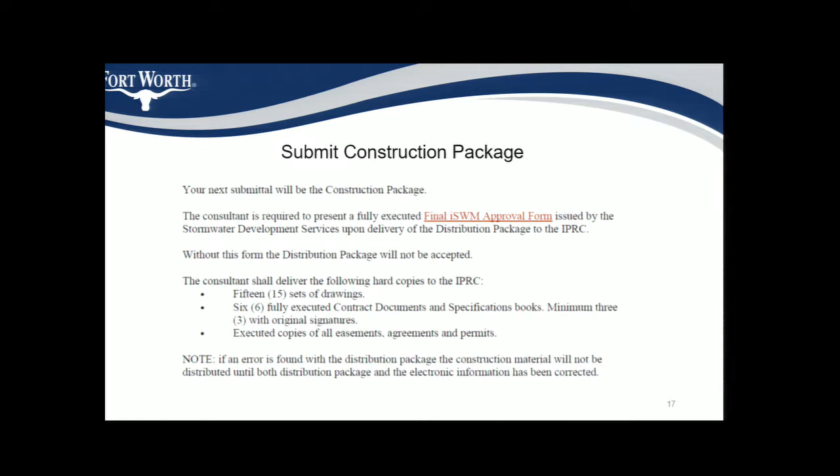The City of Fort Worth Developer Project Proposal Tool basically mirrors the bid proposal of the plan set. The purpose of it is for the city to collect these different unit prices to be filed, cataloged, and used in the future pretty much for setting up internal city projects. That's my understanding.

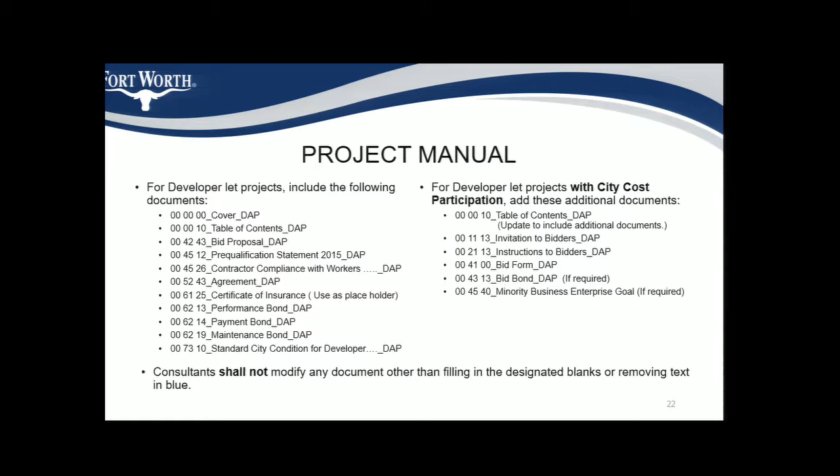The bid proposal is one of the requirements in the project manual. As you can see, there are two examples of a standard bid proposal pay items listed on the example.

Standard CFW bid item descriptions were created to reduce the number of variations of pay items submitted over the years. Bid items provided in the proposal section are used to update the CFA unit prices.

If consultants are unaware of how to pay for an improvement, or question what the bid item includes, please refer back to the specification and it will provide direction on how to pay for that improvement. Standard bid item lists and specifications are located in Buzzsaw at the provided paths below.

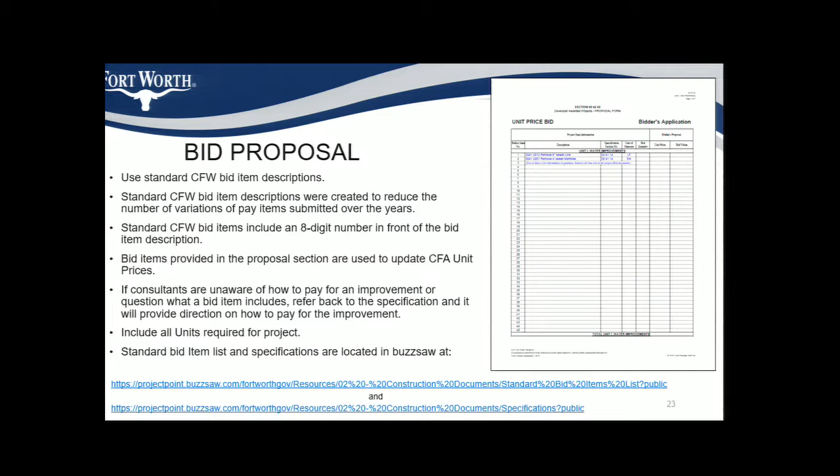On this slide, I'd like to point out to the audience that the bid proposal summary has been revised to include the bidder information and signature block. All new projects submitted to IPRC need to include the revised bid proposal summary sheet.

Another document in the project manual is a pre-qualification statement document. The IPRC only requires consultants to list the work that is pre-qualified for the major work types. Please refer back to the bidder's pre-qualification application for all work types.

Consultants must list all contractors and subcontractors involved on the project. Make sure all contractor and subcontractor pre-qualifications are up to date. If the contractor pre-qualifications are not up to date, the contractors will not be allowed to move forward. Pre-qualified contractor lists are located in Buzzsaw at the provided path below.

Next topic I'm going to be discussing is what IPRC defines as a 100% construction plan set. The IPRC defines a 100% construction plan set as having all the required components in a plan for review. Basic required components in a construction set of plans is cover page, final plat, general notes, water, sanitary sewer, so on and so forth, and construction details, whichever is applicable for the project.

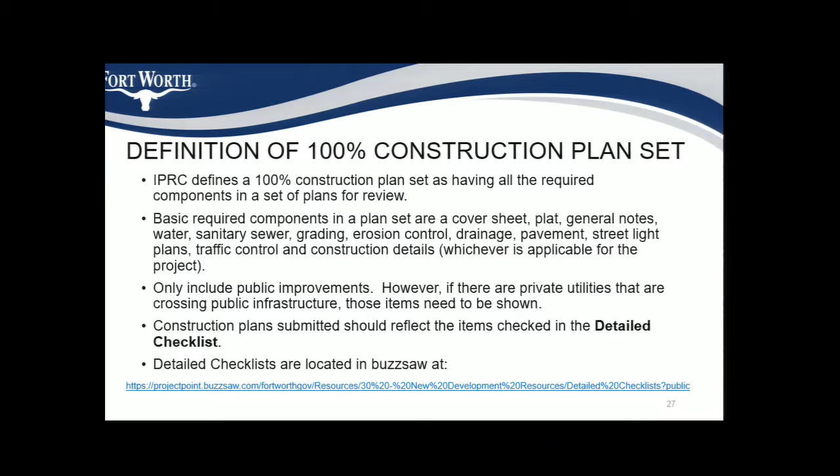The next set of slides are going to be examples of each component in a set of plans. First off, the cover sheet. We are no longer using the DOE number. Please make sure you have your preliminary PE information shown.

The PE has to be registered in the state of Texas. If not registered in the state of Texas, plans will not be accepted for review. Also, your Texas firm number will need to be required on the cover page. The developer cover page template is located in Buzzsaw at the provided path below.

The final plat. A final plat can be either an FP or FS. Those of you who are aware, FP stands for final plat, FS stands for short plat. Planning and Development will assign the final plat number. When plans are submitted to IPRC, the plan set shall have a final plat number shown on the plat. Handwritten numbers will not be allowed on the plats.

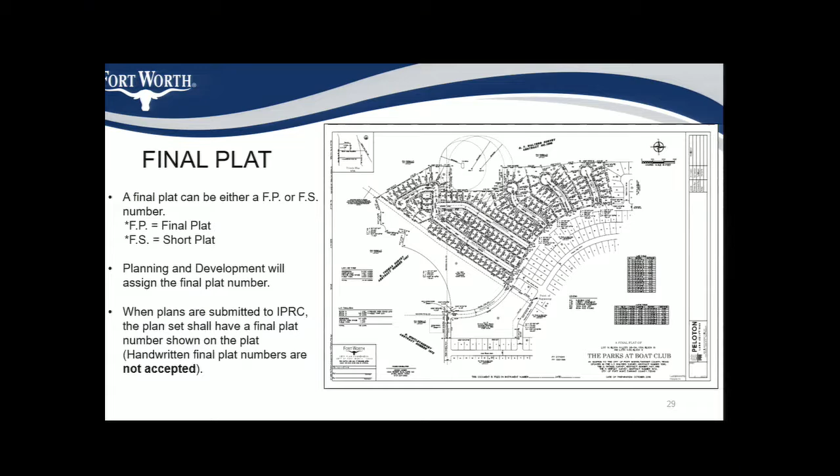General notes. Make sure you include all the divisions applicable to the project. Make sure you include your correct IPRC project manager contact information. Please note that the Water Department is currently updating their water and sanitary sewer notes. Notes are located in Buzzsaw at the provided path below.

The water layout. Here's an example of the water layout. Please use 1 inch equal to 100 scale for the layout. Make sure your water mains are located on the north or east side of the parkway, 5 feet off the property line. Provide any curve data.

Please differentiate between pressure plane boundaries and water lines. Also include the insertion and removal of cleaning pigs and cleaning wyes for each line that you are constructing. Provide water center line stationing and show existing and proposed easements.

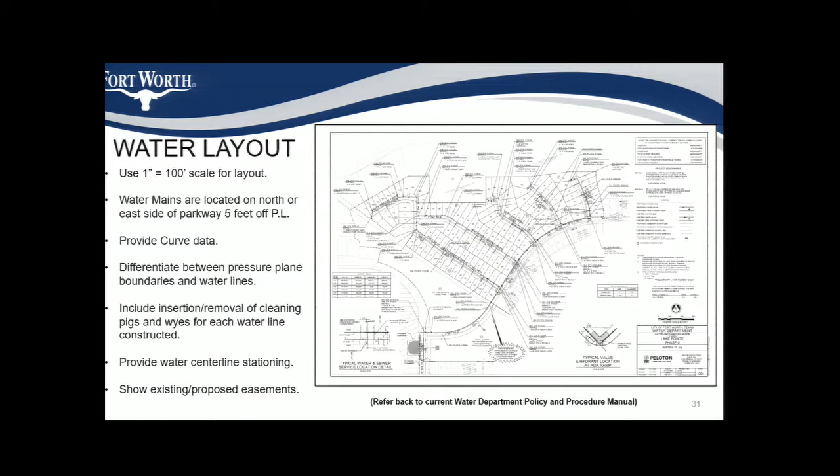Here's a typical example of a water plan and profile. Use 1 inch equal to 40 for a horizontal scale, 1 inch equal to 4 for a vertical scale. Water lines 12 inches and greater require a plan and profile. This needs to be on one sheet. This will be addressed in the upcoming Water Department manual update.

Please provide a construction sequence when water lines need to be lowered due to conflicts. Show existing and proposed surface, grades, and labels. And please show all top-of-pipe elevations in your profile. No flow lines, please.

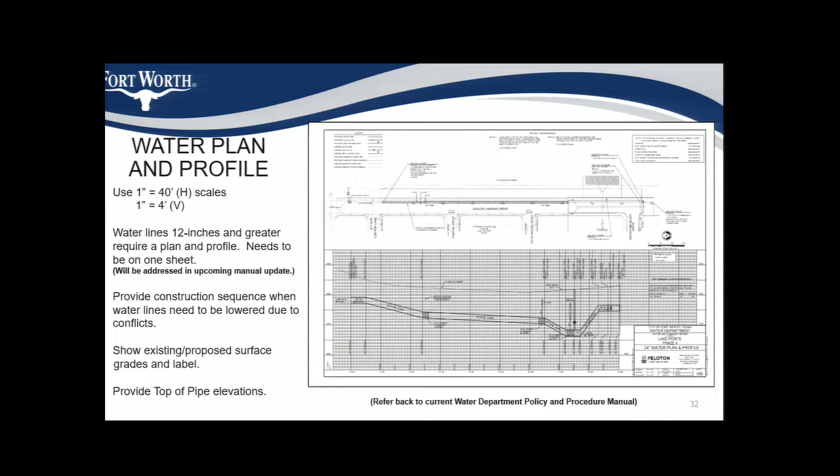Just like the water layout, the sewer layout requires 1 inch equal to 100 scale. Sewer mains are to be located in the south or one quarter point, west quarter point of the street. Make sure your manholes are meeting maximum spacing requirements. Provide any curve data. Minimum radius and manhole spacing needs to comply with TCEQ Chapter 217 requirements.

Provide sewer centerline stationing and show existing and proposed easements.

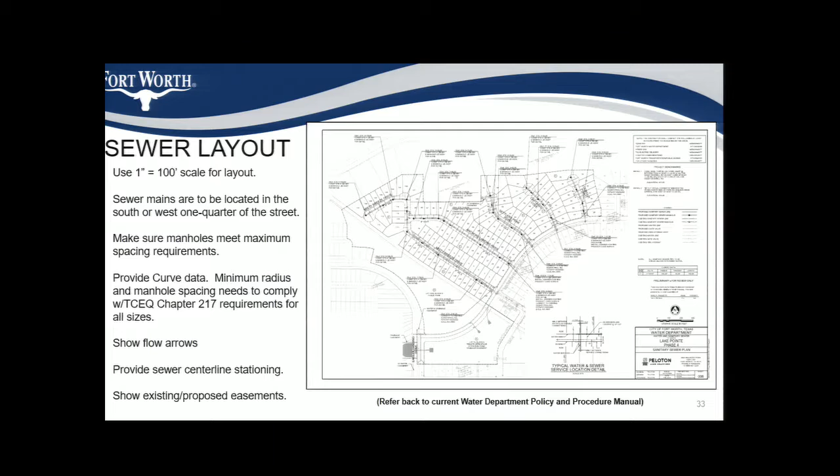Sewer plan and profile, same thing as the water. Please show 1 inch equal to 40, 1 inch equal to 4 vertical. The plan and profile need to be on one sheet. Let me explain a little bit on this. The reason we're asking to have the sewer plan and profile on one sheet is because when you guys update plans, there are items that are missed, such as crossings that aren't reflected, and then that means we have to go back to additional reviews. So this is also going to be updated in the upcoming Water Department manual update.

Sewer grades need to meet minimum and max grades for all pipes. Water and sewer crossings need to comply with TCEQ Chapter 217 requirements.

Here's another topic: show all parallel storm drains. The reason we're asking to show all parallel storm drains is to ensure that there are not any conflicts with the sewer services and the storm drain.

Provide pipe capacities for 10 inches and above in MGD.

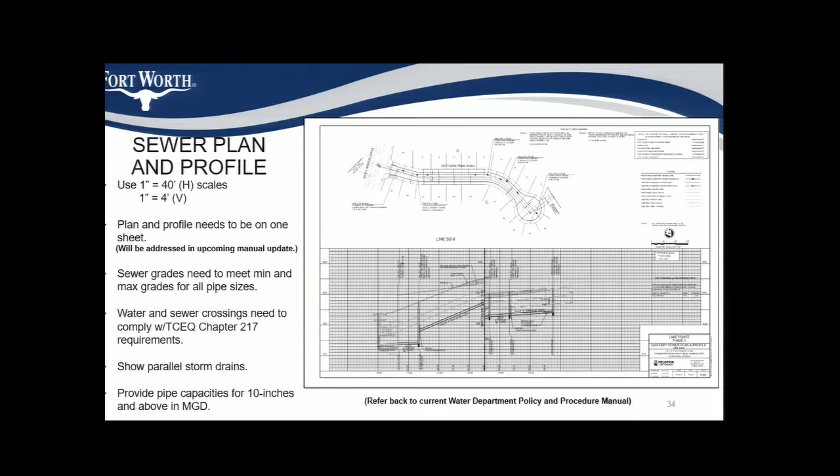Here's a typical example of a water detail sheet. For multiple water line lowerings, provide a table. Do not use your own detail; our detail specifies the specifications on each item. For water mains 16-inch and greater, make sure you pay attention to the minimum burial depths noted on the details for valves and air releases. Once again, the details are located in Buzzsaw at the provided paths below.

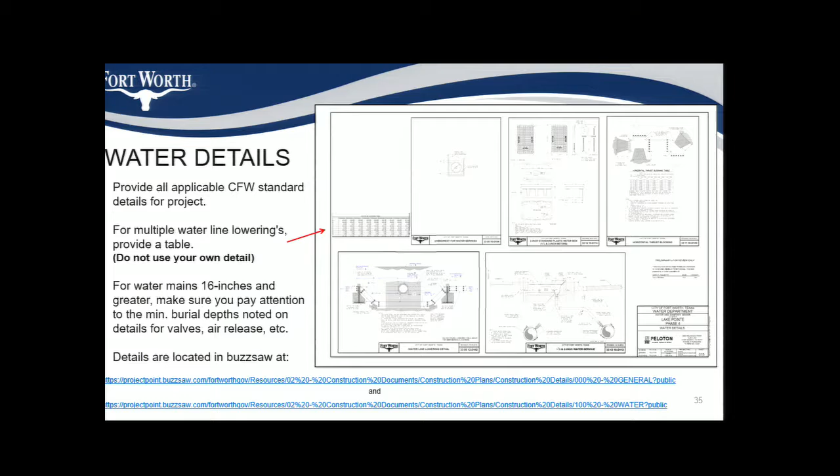Here's a typical example of a waterline lowering table. As you can see, we have multiple waterline lowerings. Each crossing has its own top of pipe elevations corresponding to the detail that we have on Buzzsaw.

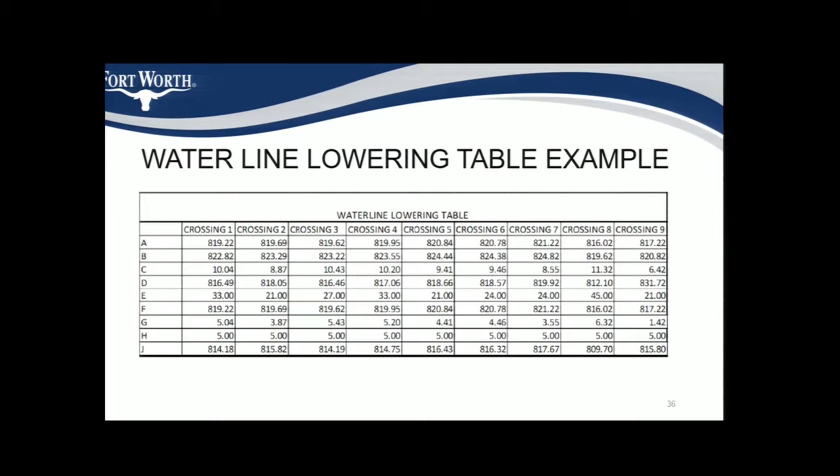The sewer details: make sure you include the appropriate manhole lid assembly detail, as there are multiple ones for different scenarios. Be mindful that minimum depth allowed on drop manholes is 2 feet. Hydraulic slides will be required when this cannot be achieved. Please refer back to the detail for any specifics.

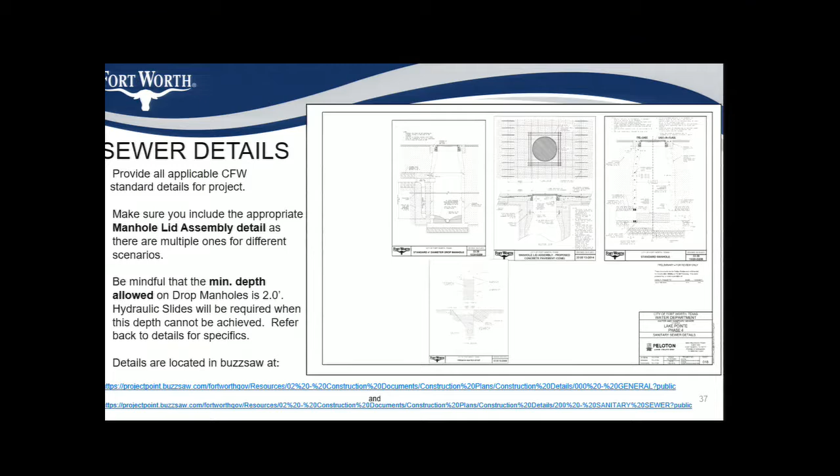Here's a typical example of an erosion control plan. Provide the standard general erosion control detail note. Provide all applicable erosion and sediment control measures. One thing we want you to do is clearly delineate the total area of disturbance in acres. Show all existing and proposed storm drain infrastructure.

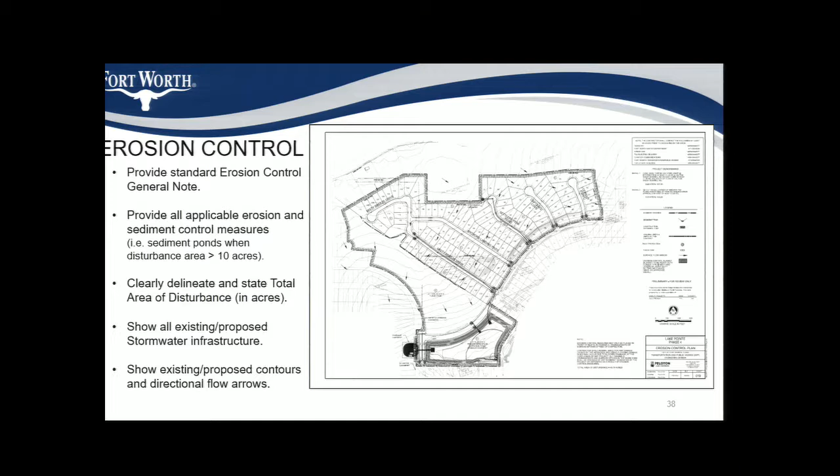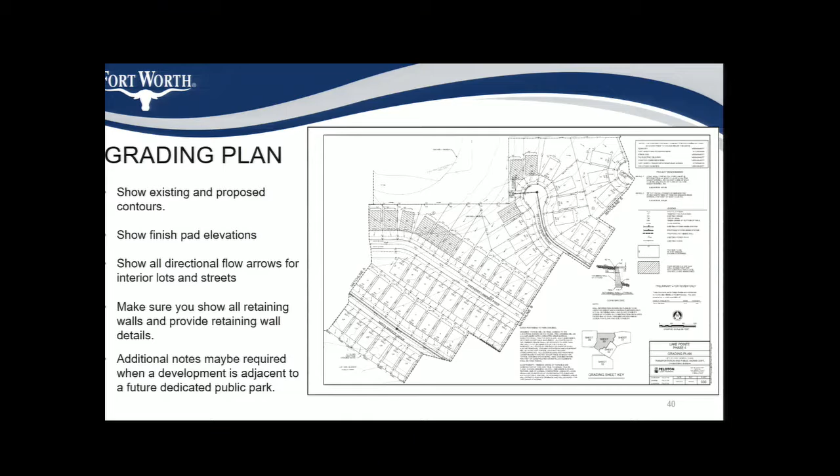Grading plan: show existing and proposed contours, show finished pad elevations, show all direction of flow arrows for interior lots and streets. Make sure you show all retaining walls and provide all retaining wall details. Additional notes may be required when a development is adjacent to a future dedicated park.

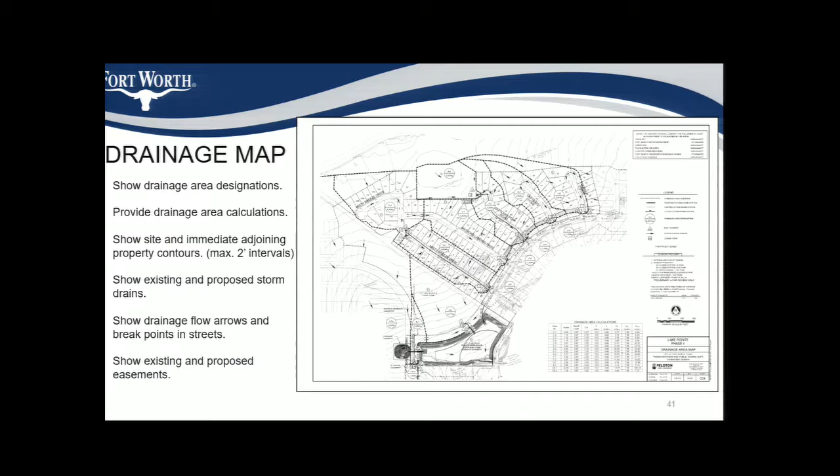Drainage map. Show the drainage area designations, provide drainage area calculations, show site and immediate adjoining property contours at maximum 2-foot intervals, show drainage flow arrows and breakpoints in the streets.

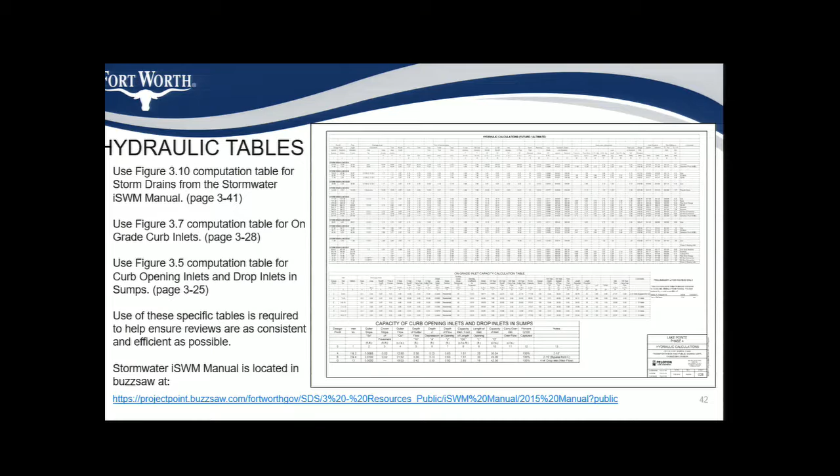Hydraulic tables. This is one item that we usually have issues with because we get variations of hydraulic tables submitted. Use these specific tables. The use of these specific tables is required to help ensure reviews are as consistent and efficient as possible. The Stormwater iSWM manual is located in Buzzsaw at the provided path.

Here's a typical example of a storm drain plan and profile, same thing as the water and sewer. Use a 1 inch equal to 40 scale, 1 inch equal to 4 vertical scale. Provide any curve data. Place the storm drain in the opposite quarter point of the street from the sewer. The reason we're asking for this is to make sure that there's no conflicts between the manholes, between the sewer and the storm drain. It doesn't leave much separation for crews to do any maintenance work on any lines when they have to be repaired.

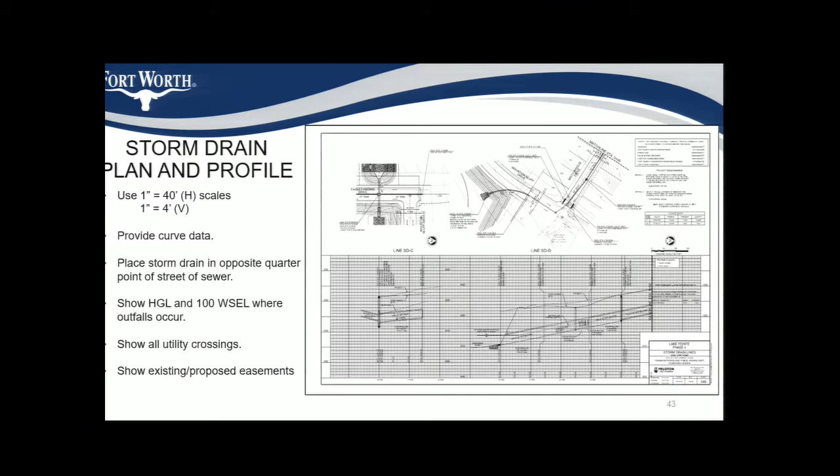Show the HGL and 100-year water surface elevation where outfalls occur. Show all utility crossings, and once again, show all existing and proposed easements.

Paving plan and profile: provide horizontal and vertical curve data when applicable. Please show elbow and cul-de-sac geometrics, including cross sections for elbows. Hatch and label all fill areas. Spec 114 is no longer used in the City of Fort Worth, so make sure you're using the updated specification.

Street grades need to meet min and max grades for all street classifications. One item to be pointed out is to make sure you dimension your existing and proposed streets. We've come across some situations where we've had various cross sections that don't match up with the existing pavement.

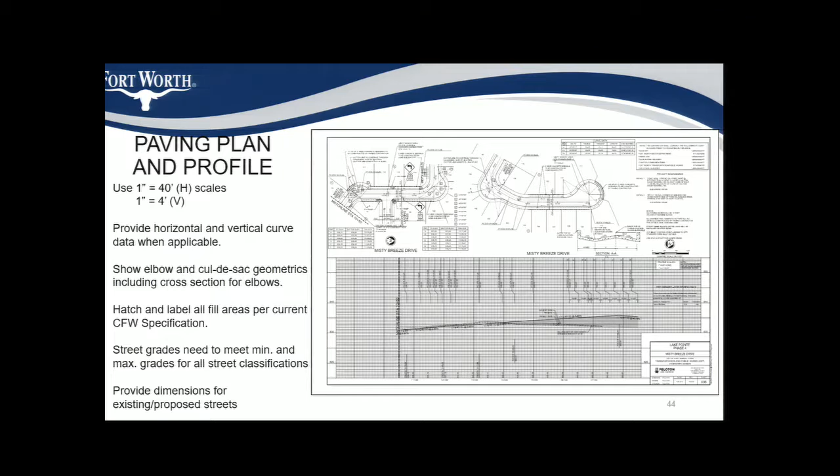Pavement details. Parabolic sections are not allowed for new streets. The details shall reflect the geotechnical report and the pavement design manual for pavement thickness, reinforcement, etc.

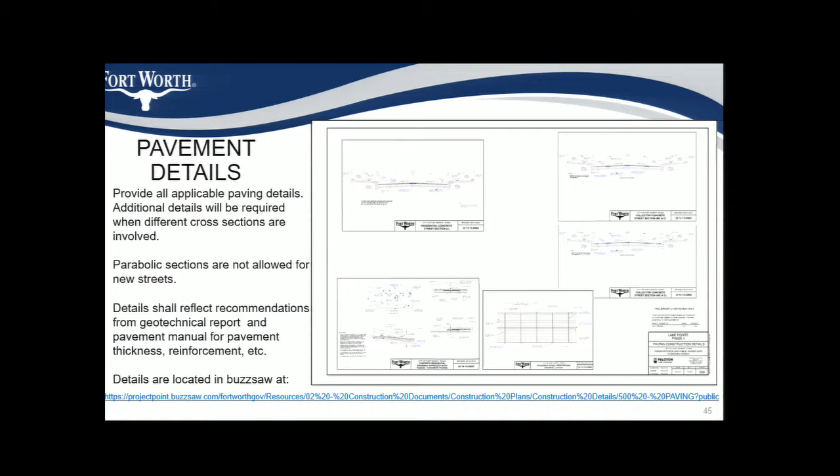Drainage details. Here's a typical drainage detail layout sheet. Please note TxDOT details will be required when applicable. Show your wing walls, head walls, and so on and so forth.

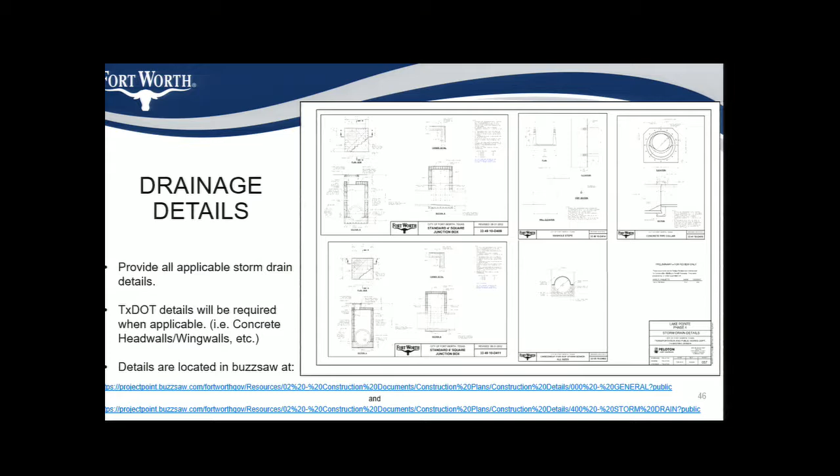Street light plan, use 1 inch equal to 80 scale. Show existing and proposed street lights, conduit runs, ground boxes, etc. Make sure the street lights are located on the opposite side of the water line. Provide conduit tables and quantity takeoff tables, please.

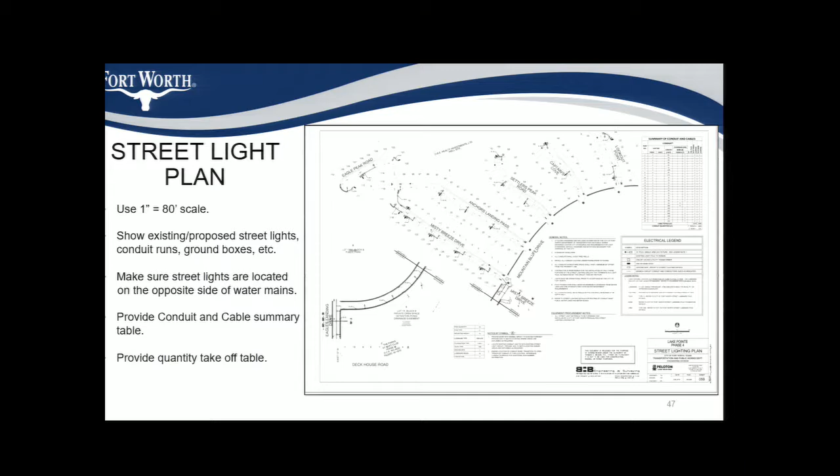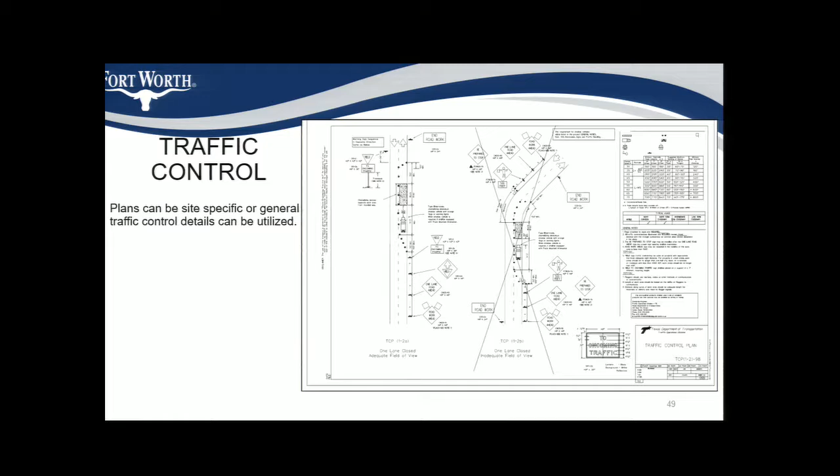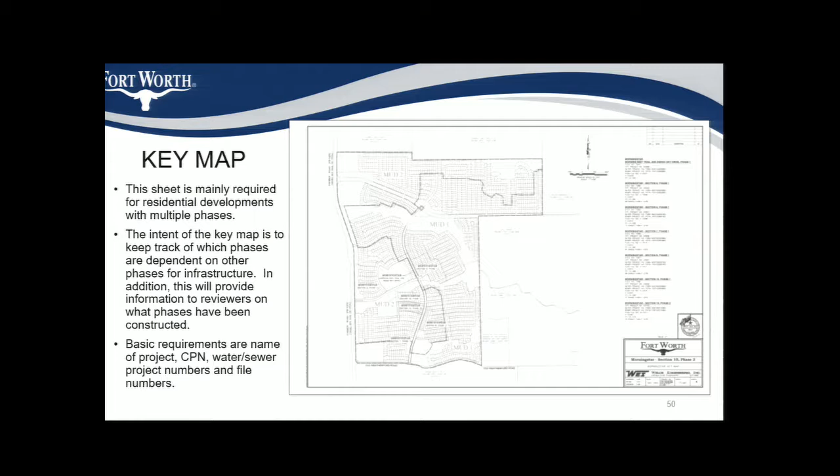Basic requirements are name of project, CPN, water sewer project numbers, and file numbers.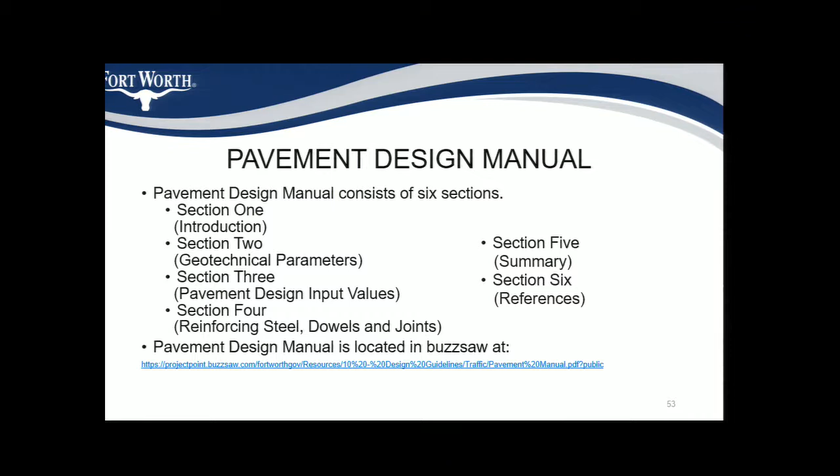Street classifications. For the current 2016 Master Thoroughfare Plan, MTP, the street classifications are as follows. Local streets are limited local, standard local. Collector streets are standard 2-way left turn lanes, standard undivided. One thing I want to point out is that a residential street can be considered a collector street when the daily traffic volumes exceed 2,500 vehicles. So please be mindful of that.

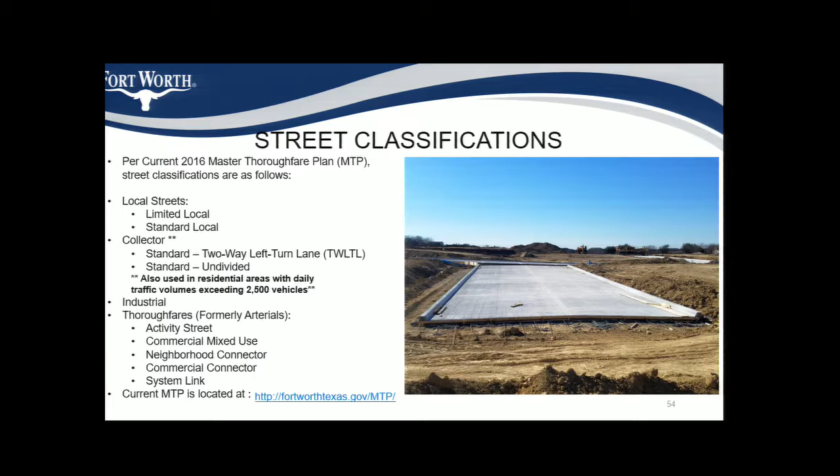We also have industrial sections, thoroughfares, and the current MTP is located at the provided link below. Geotechnical report.

Geotechnical engineer / consultant shall use the pavement design manual dated January 29, 2015, with the revised date of December 14, 2015.

Geotechnical reports need to meet minimum pavement design manual requirements based on street classification. Reports are required at the first review to the city when public streets or public access easements are to be built. You'll need to include the WinPAS printout report with the report.

If a City of Fort Worth project manager deems the geotechnical report insufficient, a revised report or addendum will be required. Please note that the City of Fort Worth does not provide traffic counts. Traffic counts should be provided through a traffic impact analysis to determine the annual ESALs.

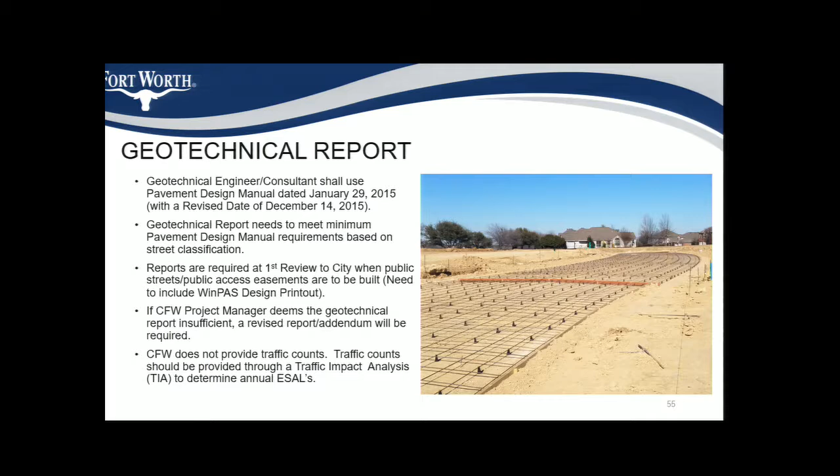Street cross sections. City of Fort Worth only allows rooftop cross sections. Once again, parabolic cross sections are no longer allowed. Consultants need to verify existing pavement cross sections on previous development phases to determine what was constructed.

If a parabolic cross section was constructed, you will need to provide a transition between the rooftop and parabolic cross section. Based on previous experience, we recommend a 50-foot transition.

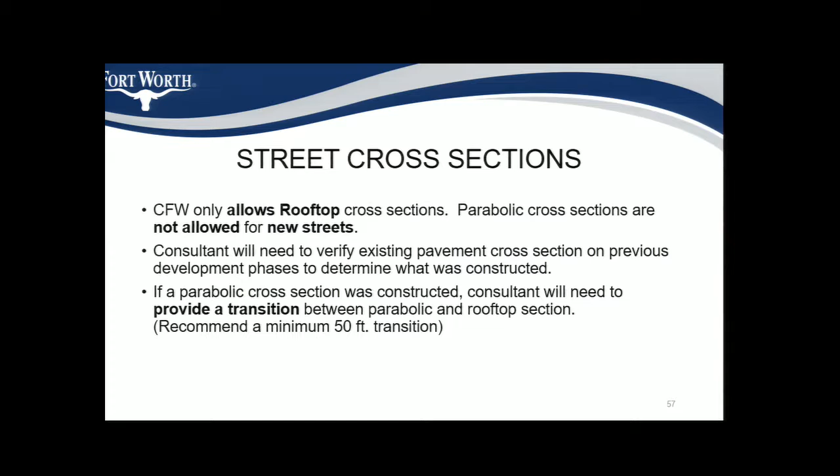Paving construction details. I'm not going to go through each paving detail, but these are the standard details that need to be shown on the paving detail. Please note that machine-laid concrete shall be Class P 3600 PSI, and hand-laid concrete shall be Class H 4500 PSI. Please refer back to specification 321313 for concrete paving for any further information.

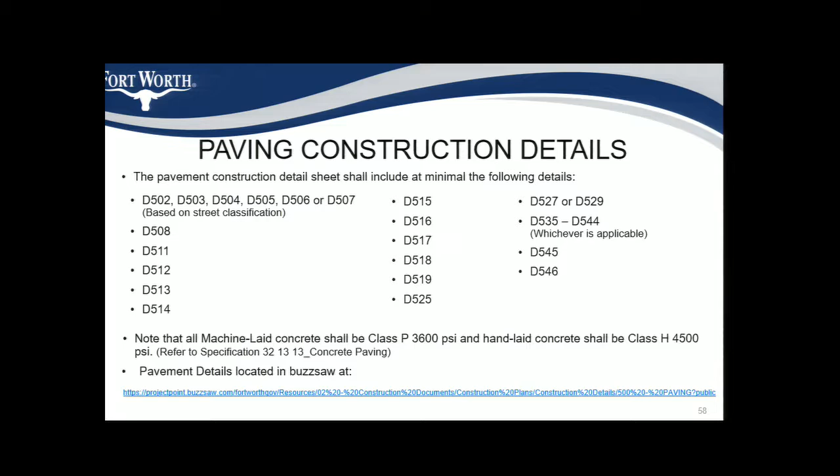Here's always an interesting topic: the TPW utility construction policy. This policy has been in place since March 14th, 2001. Please note that the City of Fort Worth is looking at updating this policy, and we will let you know when the policy has been finalized.

New pavement requirements: if a utility company desires to cut the street within the first 2 years of construction or reconstruction, the utility company must reconstruct the entire street curb to curb at its own expense.

So questions come up as to why we tell you guys not to cut the street in the first 2 years. If you cut the street in the first 2 years, you're repaving the entire street. So that's why we tell you to make sure you have all your services in at that time.

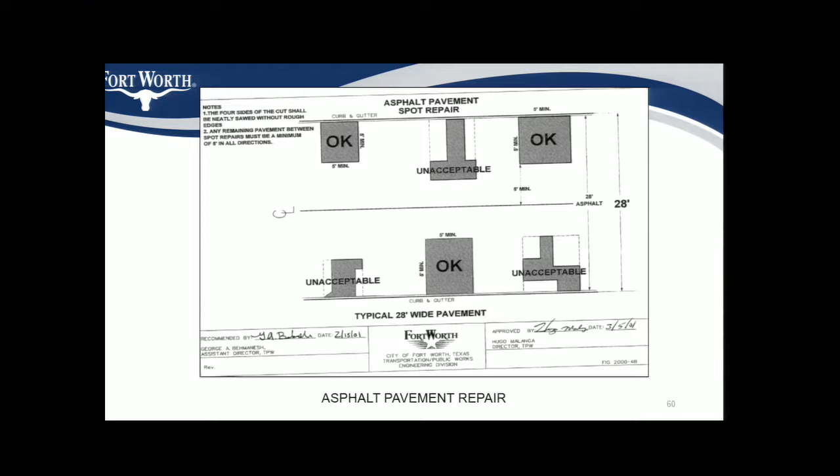Here's an example of the asphalt pavement repair per the TPW utility construction policy guideline. And I've also provided the example of the concrete pavement repair per the TPW utility construction policy.

Finally, moving on to the CFA exhibits. Basic concept for the CFA exhibits: after several discussions between city staff, consultants, and developers, it was agreed that the CFA exhibits would be a basic stick figure exhibit, and any further design questions would be answered by referring back to the construction plans. CFA exhibits still require project information, legend, scales, and line work.

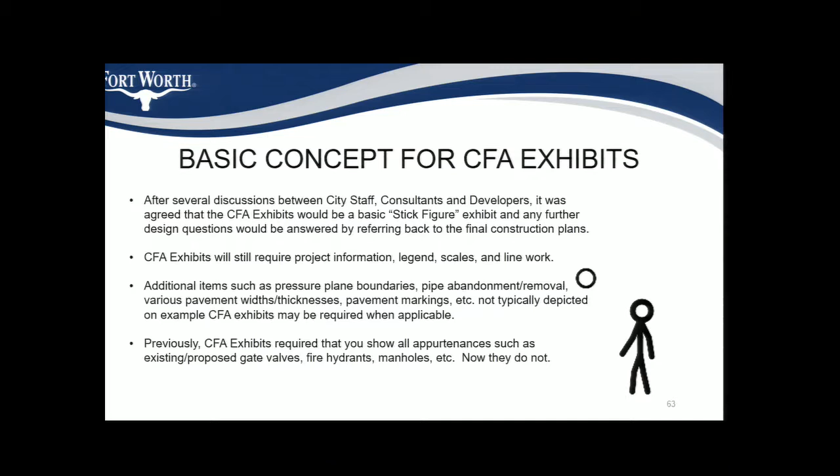Additional items such as pressure plane boundaries, pipe abandonment removal, various pavement widths and thicknesses, not typically depicted on example CFA exhibits, may be required when applicable. Previously, CFA exhibits required that you show all appurtenances, existing and proposed, such as gate valves, fire hydrants, manholes. Now they do not.

Per the standard community facilities agreement, the standard exhibits are as follows: location map, exhibit A; water improvements, exhibit A1; sewer improvements, exhibit B; paving improvements, exhibit B1; storm drain, exhibit C1; streetlights and sign improvements. Use these standard designations for each exhibit submitted to IPRC for review.

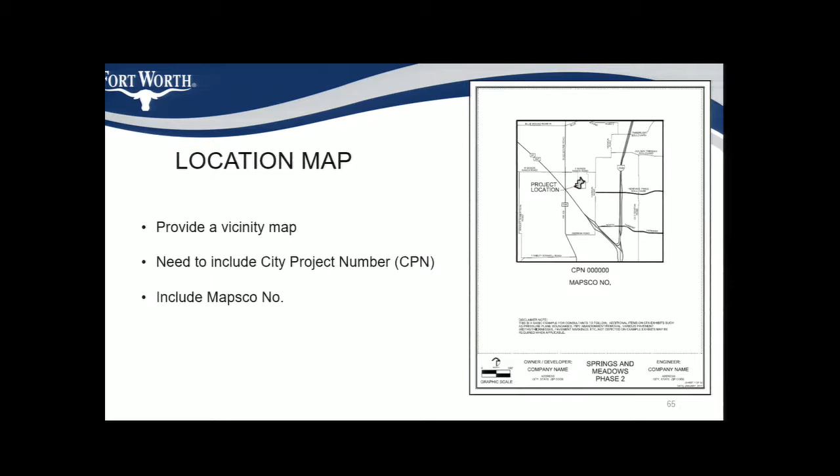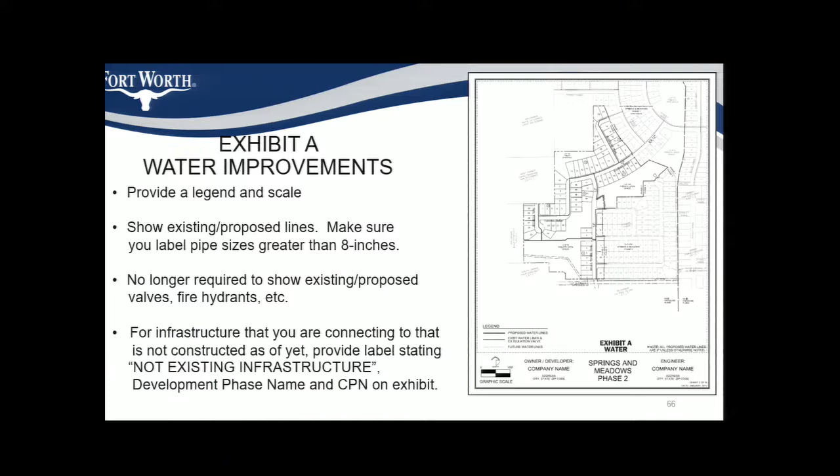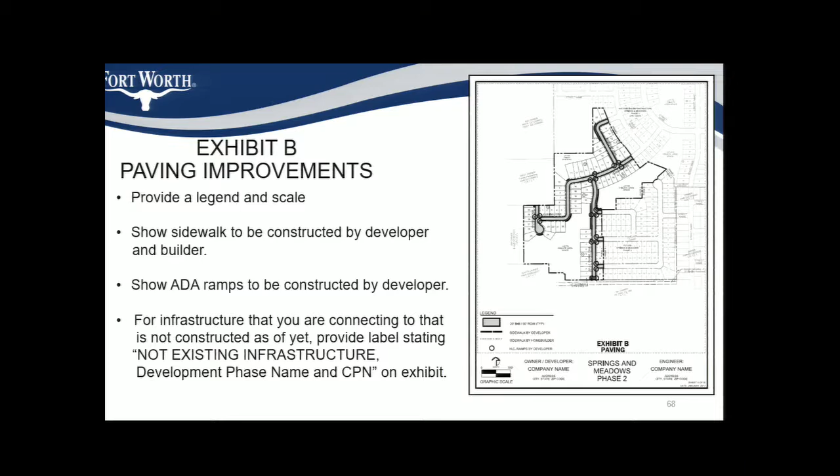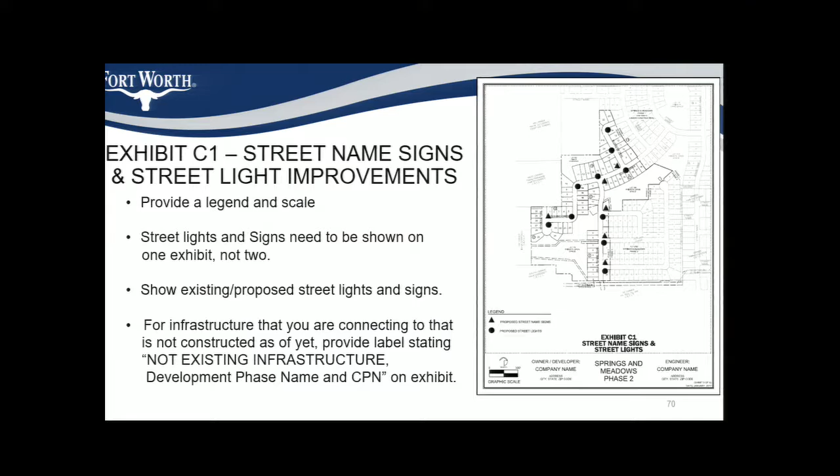Any questions? That was a lot of information to get through.

Question: so with the 2 years on the pavement, does that include making curb cuts, mainly for the purpose of driveways? On that application, I don't think that would be the scenario. Of course, you're going to have home builders coming in making improvements, so they'll have to cut the curb, but it's any cuts in the actual pavement section, so the curb should be okay. So connections to the street are okay, it's just any significant changes to the actual pavement that was laid. Right.

Yeah, just to verify, is that 2 to 10 years we can't touch the street? Did you say it was going to be changing? Let me check that real quick. Okay, so for 2 to 10 years, you can cut the pavement, but you're going to have certain requirements on the asphalt and concrete pavement. You'll have to replace the full panel as indicated on the criteria outlined below. What was the other part of your question? I didn't know if that was just 2 years or going to be up to 10 years. Like field operations, if they're having to install a tap, are they not going to be able to touch it for 10 years? It applies to any person touching the street, whether it's city crews or anybody else. Policy is consistent all the way through the city.